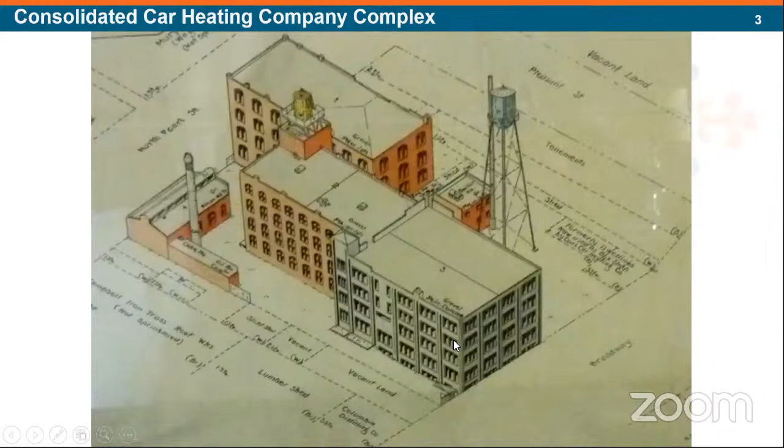The building's history and historic context are documented by the Sanborn maps. The building presents a clear material, structural, and spatial divide, distinguishing each period of construction. The 1893 and 1906 portions of the building, as illustrated on this 1908 Sanborn, feature brick-bearing walls with mill construction. The 1906 portion is set back to the south and east, while the 1893 portion is closer to North Pearl Street. Both portions historically featured 6/6 and 2/2 double-hung wood sash windows.

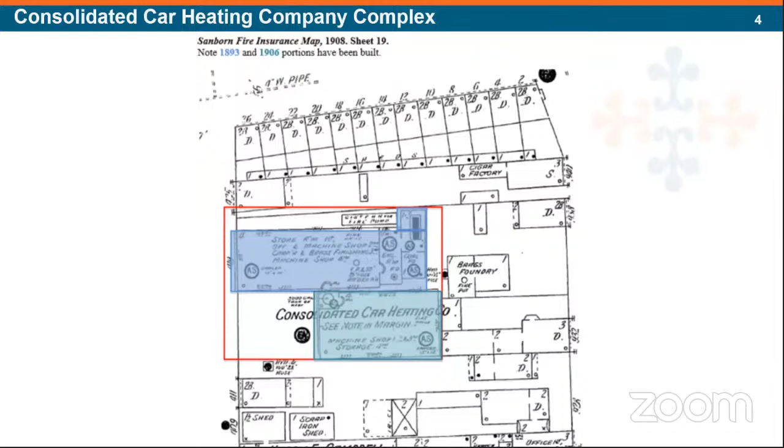Some do remain extant; however, most have been replaced with 1/1 vinyl sash. The windows featured arch heads and brick sills, typical of factory construction at this time. Next slide, please.

As you'll see in some of the images I have, a single-story concrete addition was added to the south of the 1913 portion in 1965. This is a non-historic component of the resource. Next slide, please.

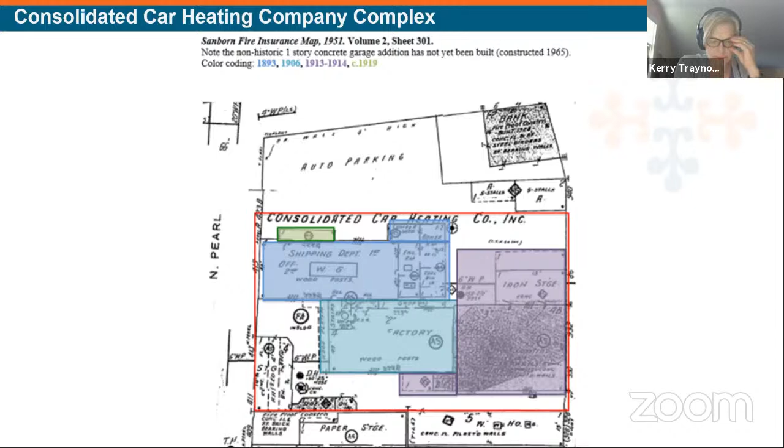I think it's interesting to know that fact, but I don't know that it matters. When it was on the side of saying everything up through the 1960s, it's a 50-year gauge, whether the property boundaries changed or not is interesting to know, but I don't think it changes the concept that this manufacturing complex adjusted and modified its physical features, including the site. But it is interesting to the question.

Yeah, I think it's less significant. If we had found that this was always part of it, used for various functions, and eventually as the 1965 building, that would be a strong argument for the complex. It has an independence in its own right that was added for a much different time and period and use.

And I can see it in the neighborhood, in the entire district, but I wouldn't like to include it in the period of significance. It's very well documented. It's a very specific thing that warrants an independent identification on it.

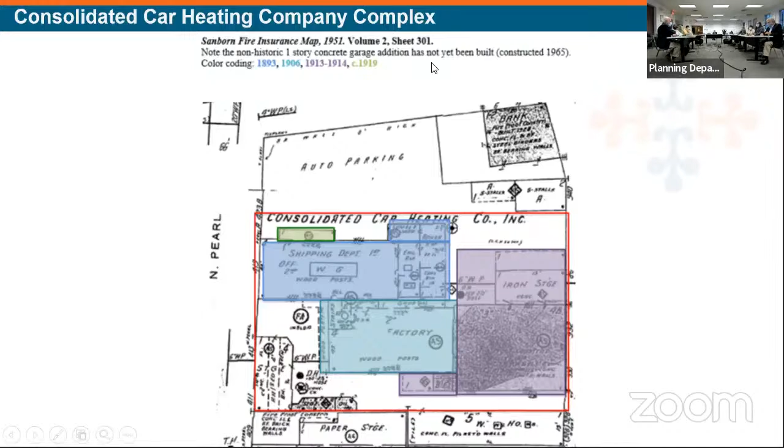Well, let me try my motion again. I'm not changing where I was, but the words are. I'm not certain how it gets excluded from the story in any way, whether a house is significant, less significant, more significant, it's part of the lineage. So my motion would be that we support the nomination as presented to us, and we express interest that all elements constructed within the 50-year period be considered in determining the period.

Second. Any other people signed up to say anything? Anyone from the audience care to comment on this? Okay, we have a motion, a second, I'll call it to a vote. All those in favor, say aye. Aye. Opposed? Motion is carried.

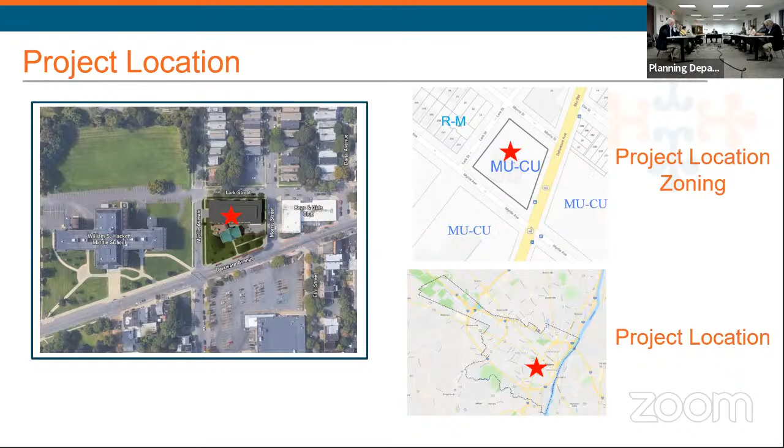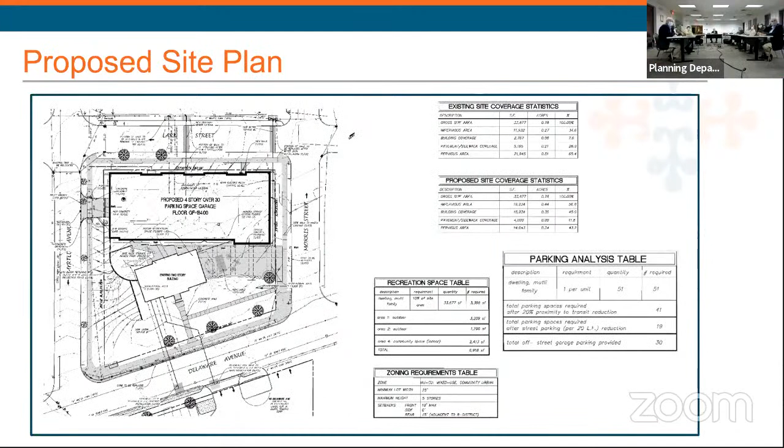I'll let Matt go to those. Okay, I think initially I'd just like to tell you that the site plan has changed somewhat. If you go to the existing conditions, it doesn't interest anybody other than the fire signal building shown there. That's the full site plan - it's changed, the shape of the patio has changed, and we made an attempt to save two more trees at the request of the city forester.

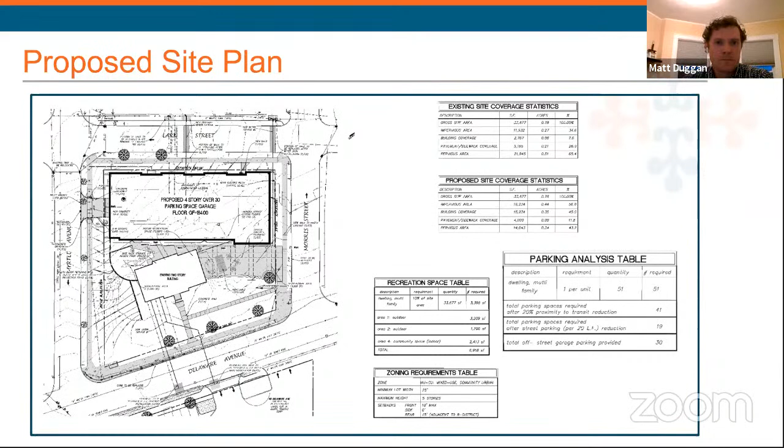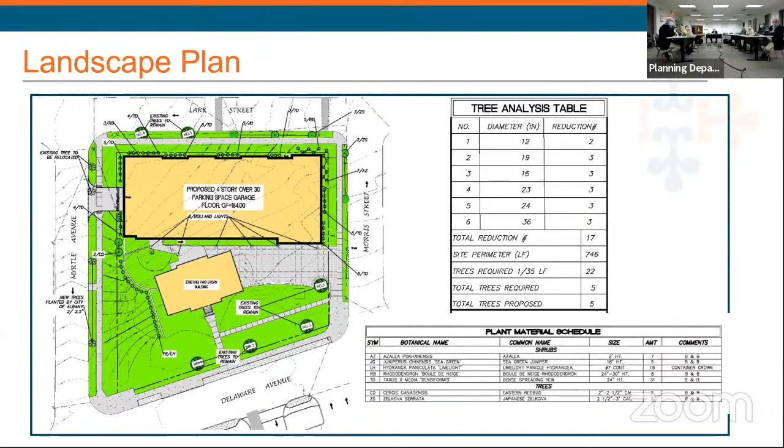If you go to the next sheet, which is the landscape plan, it shows the trees we can save, and it gives you an idea of the plan. We actually got our site plan approval from the planning board, conditional upon HRC's approval, so they were satisfied with the change we made to the site, and all the departments were satisfied. We had a whole bunch of other issues, stormwater management issues, as you might imagine with a site like this, which is in a combined sewer overflow area. We ended up putting a significant storage structure beneath the garage. We went through a whole bunch of issues there.

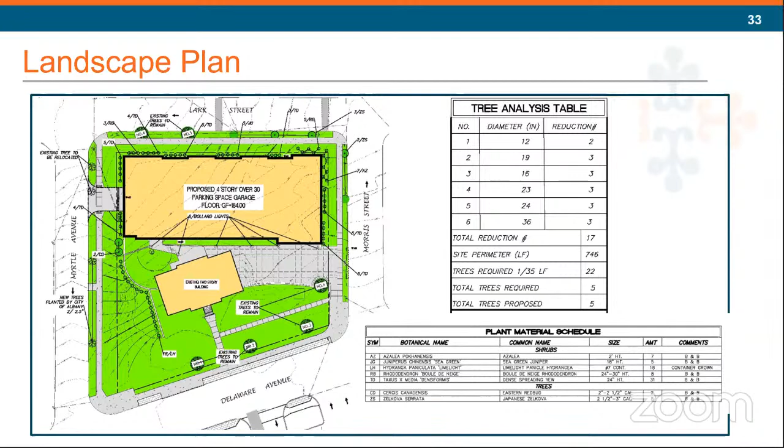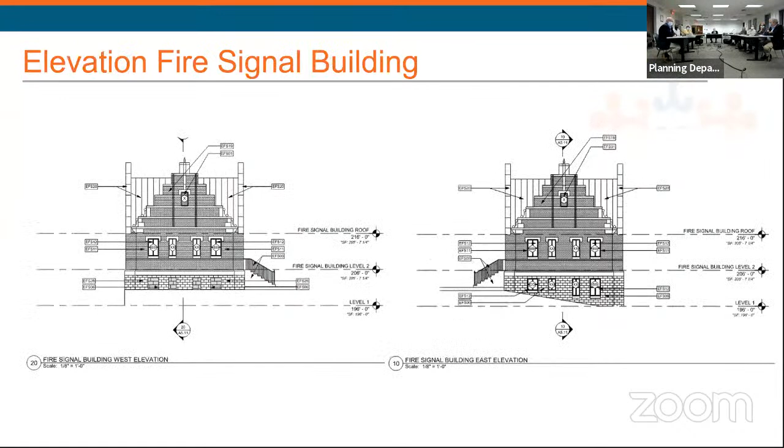But the issues that you folks are concerned with, if you go to slide number 6 - I think your numbers are different, these are different - I'm going to go right back to the one after the landscape plan. I'm going to let Matt Duggan take over at this point. Matt, you want to start them through the review?

Thank you all, it's good to see you at least virtually again. So one of the things I want to note as we go through this presentation is that we did include all of the comments from the June 2020 meeting and also from the summer 2020 site visits. As we go through the presentation, where we have the appropriate image, or in some cases there really isn't the need for an image, we have put in the comments and the design team's response to those comments.

Here is the Delaware Avenue elevation of the fire signal building. Here is the rear elevation of the fire signal building. At one point, the two buildings were proposed to be connected with a canopy; that is no longer part of the project. In this rear elevation, you can see the gray highlighted areas - those areas are currently large openings. So the backside of this building has significant masonry infill work proposed, and there are no existing windows on this elevation. I'll speak more about that as we go through some of the commission's comments from last year.

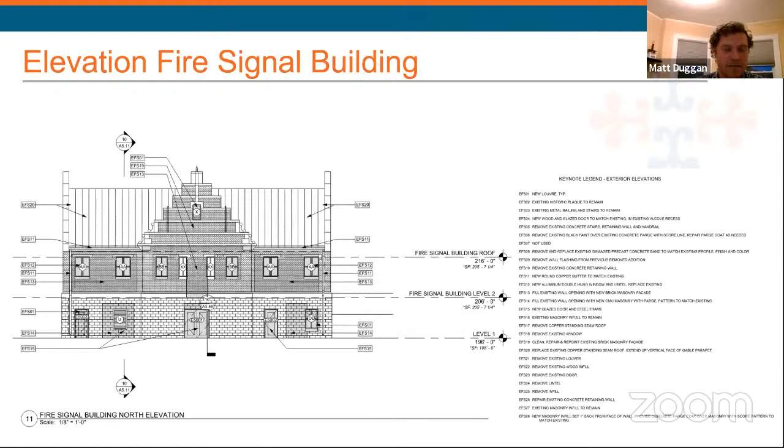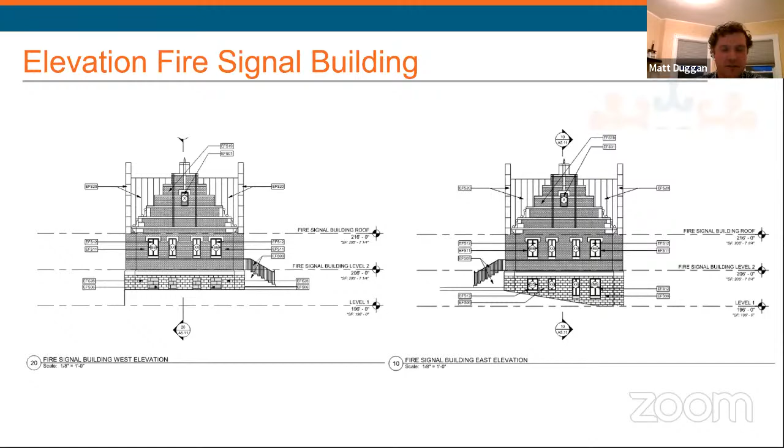Next slide, please. So these are now the west and east elevations of the building. The east elevation is the side that is presented as you enter into the site as a pedestrian. You'll see that as we go further into the presentation. Next slide, please.

So we've included the floor plans here to help orient how the building works and what is located on each floor. The image on the right is the ground floor. This ground floor is only accessible from the rear side, essentially the side facing the new proposed building.

You can see that on two of the four sides of this building, it is largely below grade. We'll see that further when we go to some of the images regarding the infilled openings.

The image on the left is the upper level, and this is the main floor of the building, if you will. It has an entrance with those existing stoops, which you'll see right in the center of the plan there. So from a functionality standpoint, originally the building was mainly entered from that second level, but what's proposed is for accessibility reasons that the primary entrance will be at this lower level, which is at grade.

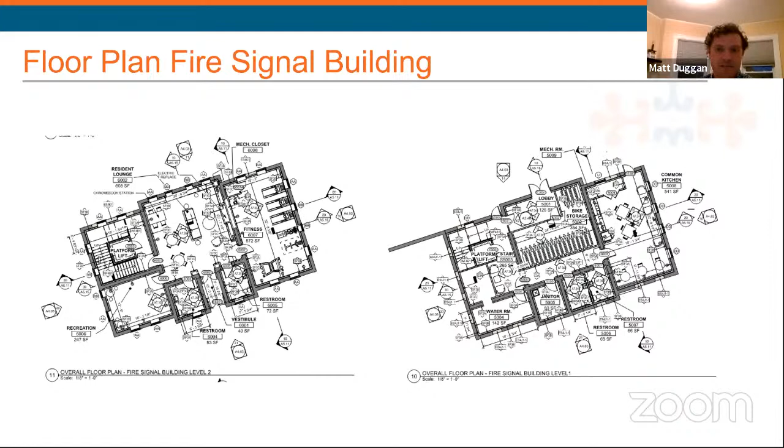So here are the first group of the site visit questions or comments. The first comment was, where existing brick units are severely spalled, new molded brick units are to match the original in all visual and physical characteristics, and to provide a sample for review and approval. So what we would like to do is provide samples and do a mock-up of this right on the building so that we can show the compatibility.

The next question is along the same lines: new mortar to match the original sound mortar in visual and physical characteristics, provide mock-up for review and approval. Our thought is we would do a mock-up for the mortar and also have the brick in that same mock-up. The third item would be to not clean the brick, but to just clean the decorative stone features along the gable copings.

So our response is we would like to do a mock-up of cleaning both the brick and the stone for approval. Next slide, please. Question on number 1 there.

Match the original, and your design response is that samples will be provided. Is the intent that those samples will all match the existing? Yes, that is.

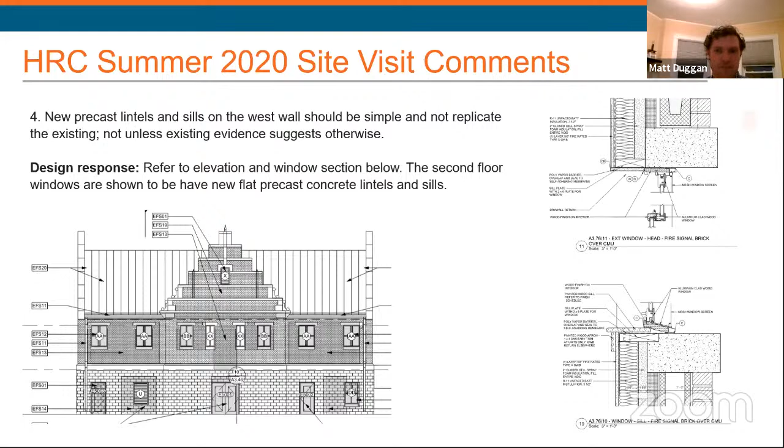Number 5, provide a mock-up demonstrating no damage to the concrete wall following removal of black paint, using the gentlest method possible. So we will be using the gentlest method possible; a mock-up is going to be very important. Start very carefully, with very low pressure, and see if that's enough, then continue to very carefully remove it with more pressure as necessary. Again, a mock-up will be done for this paint removal process.

Item 6, retain and repair existing historic copper roofing and flashing. There was no mention of replacement material — copper, patina, or aluminum with baked enamel finish matching the green patina. The existing copper material does not appear salvageable, so our proposal is to repair or replace the existing copper roofing with new copper roofing as required.

If there are salvageable portions, that is something that will happen. However, from what we're seeing, it looks like it's probably more on the replace side, but we're certainly not going to replace a copper roof that's in good shape. Again, the proposal is to replace it in kind with standing seam copper roofing where required.

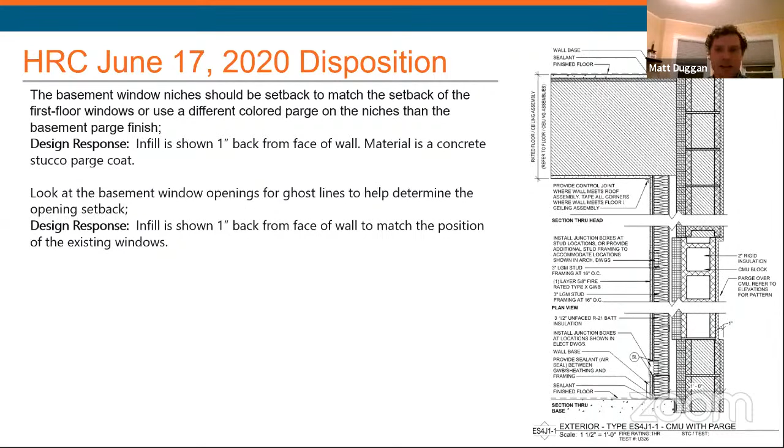And then the second comment was look at ghost lines, which is essentially what we were talking about with those score lines, and setting it back 1 inch. Next slide, please.

And again, there was a comment about that sills should be installed to evoke the feeling of windows, and those sills do exist, so those sills will be retained. Next slide, please.

Another comment was to revise the proposed stucco color on the northeast entrance to a darker color to help reduce the visual impact. The color we're proposing is intended to match the color of the brick in the fire signal building. The idea is to tie together the masonry elements of this entrance to be evocative of the fire signal building, but also take some of the more mid-century modern language from the former school, current Boys and Girls Club across the street. Again, the color is intended to match the brick of the fire signal building.

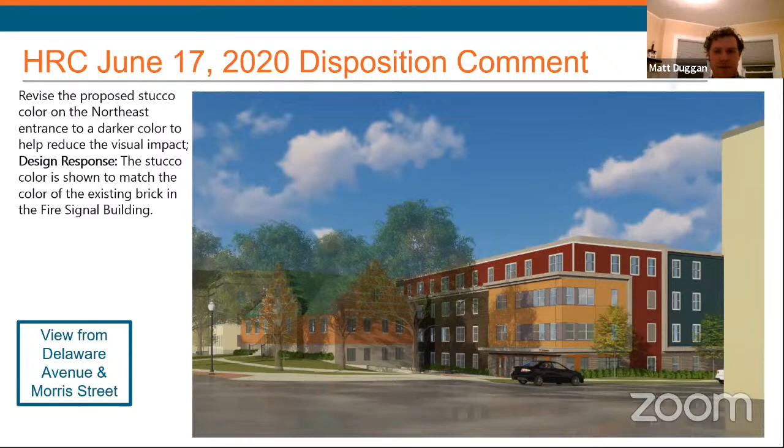Another comment was to explore the use of a random recess pattern with linear brick to provide visual relief. Since last year we've looked at the masonry on the proposed new building, and while we haven't taken this comment literally, we took the intent of adding more detail to the masonry. So what we're proposing is a soldier course along the top of the masonry and above the windows, and also a soldier course at the bottom of the windows, which you'll see in a later image.

We essentially have near floor-to-ceiling large openings. On the other portions of the building, where it's more punched openings at the units, that's where we had that soldier course below. Next slide, please.

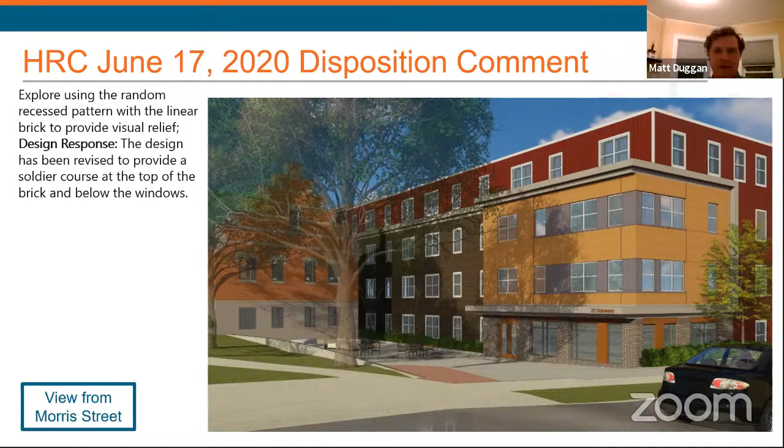In this image you can see that soldier course a bit better as we zoom in. We're trying to bring in some of the banding that exists in the fire signal building as a nod to it, and also bring in some of that masonry detail work found in the fire signal building. The comment here was to explore options to use architectural masonry block to reference the two-story masonry building instead of linear brick.

We looked at that, and we have changed the brick from what we presented a year ago. The brick is now a Norman brick, just under 12 inches long, compared to the 24-inch long brick we showed last year. This brick is different from the brick at the fire signal building, but we wanted a brick with a more linear nature, because we're really conceiving of this element of the building as having that mid-century modern influence, as well as tying into the signal building.

So we're trying to have this element be a bridge between the two buildings at this corner. Another thing this design does that's evocative of the fire signal building is that the fire signal building uses a brick upper level with a stucco parge and score lines on the lower level. Here we've essentially flipped that — we have the stucco finish with score lines on the upper two levels, and the smaller textured brick on the lower levels.

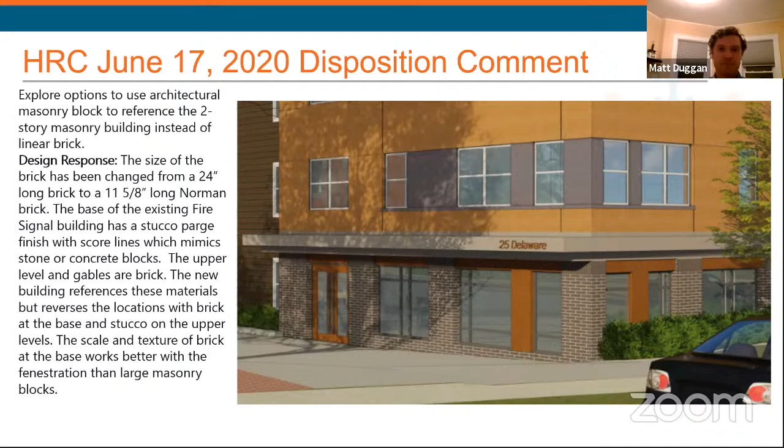The exposed concrete rear west wall should feature detailing or recesses that follow the 4-bay pattern of the residential building to reduce the visual impact.

The image below is what we presented last year, and the image above is what we're proposing today. We're looking to significantly reduce the amount of exposed concrete. We've taken the cladding of the upper levels of the building and dropped it 5 feet lower, lining up with the maroon section of the building on the left, which has a door out of the stair. That creates a nice datum line that wraps around the building.

It also works out well when it wraps to the garage elevation, landing right above the garage doors. Paired with the proposed plantings along this elevation, the amount of exposed concrete is greatly reduced. We're actually quite happy with this design direction — it makes the building feel more grounded and reinforces the scale at four stories, as opposed to buildings sitting on top of a garage. It also reinforces those bays, which you can see in the maroon color.

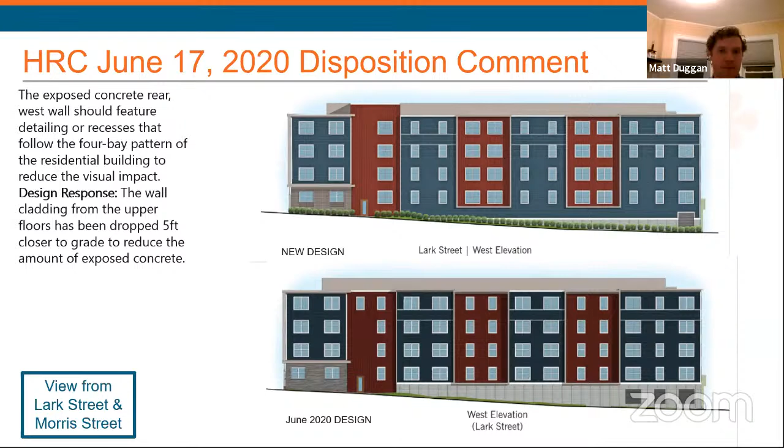Composite siding should feature a smooth finish. The design intent is to use the clapboard siding in a contemporary way to create a material transition from the predominantly masonry buildings along Delaware Avenue—that's the Hackett Middle School, the Boys and Girls Club, and the Fire Signal Building—to the predominantly wood frame clapboard buildings west of Lark Street. Using a wood grain, we feel, is more in keeping with those buildings. Our proposal maintains that, but we're using this in a contemporary way, not trying to make this clapboard evocative of metal panel or masonry. We're trying to really lean into the idea that these are clapboards.

This is the revised design from the corner of Delaware Avenue and Myrtle Avenue. You can see the garage in the lower left corner. The clapboard siding has been dropped 5 feet lower, lining up just with the top of those garage doors.

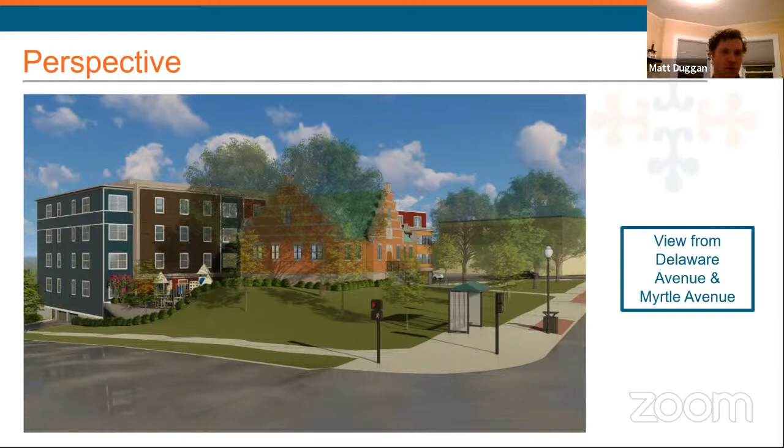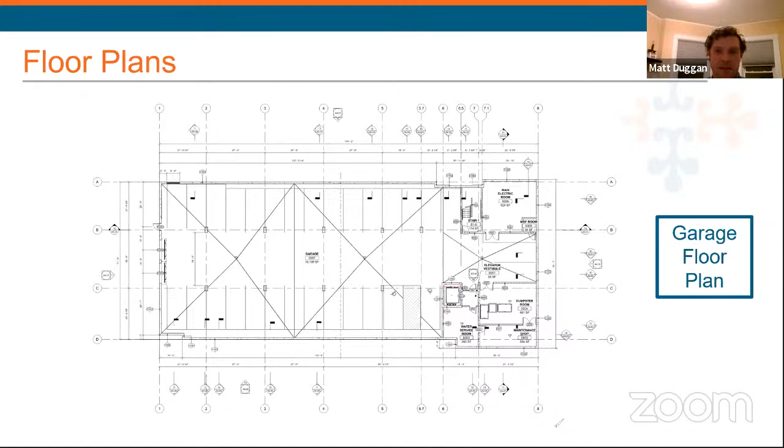I believe this is the last slide—do you mind just checking? Oh no, there's one more. The roof plan is included here to show that above the 4th level, there's a stair providing access to the mechanical units. There are mechanical units, but there is not a penthouse here—just an elevator overrun, a stair, a screening you can see here, and mechanical units serving the building.

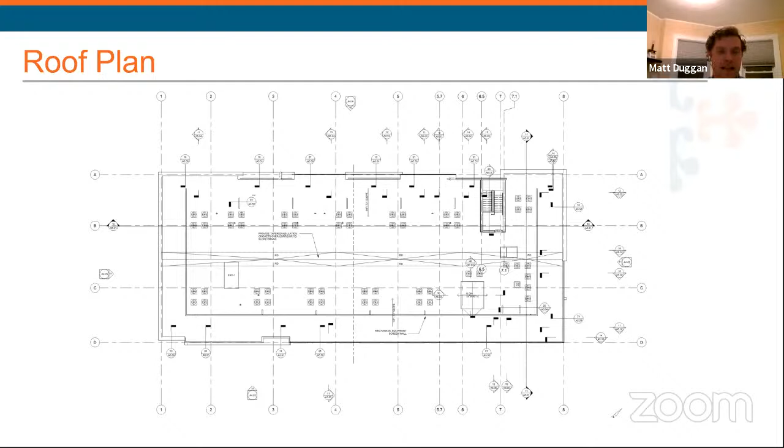Anne, if you go back one slide, there's one more thing I do want to point out. Yep. That's the last slide, I know—he asked me to go back one.

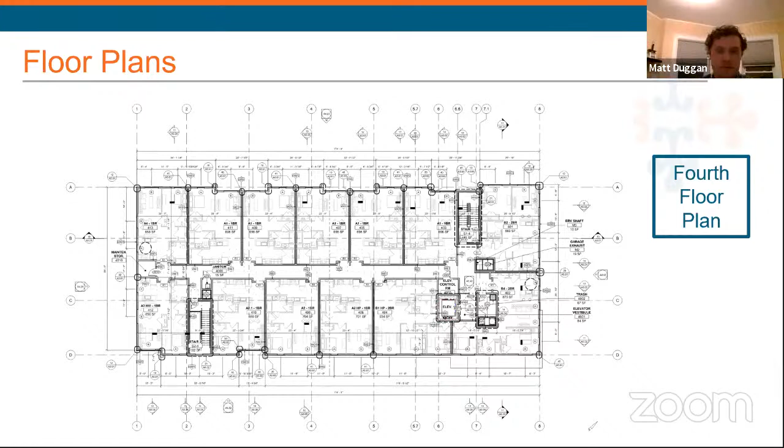I'll speak first. I'm actually pretty troubled by the project. I think the footprint is better, but this is one of our visually prominent buildings, and the level of restoration you're doing is not, in my opinion, good enough. I think you went through a lot of our concerns and it sounded like you dismissed them. I'd like to see much more effort on the existing building restoration, not just the copper roof—I'm glad you're keeping that. The treatment of the windows, the treatment of the lower level, those things are of concern to me. It's a very important building here, and it feels like it's being paid half attention to.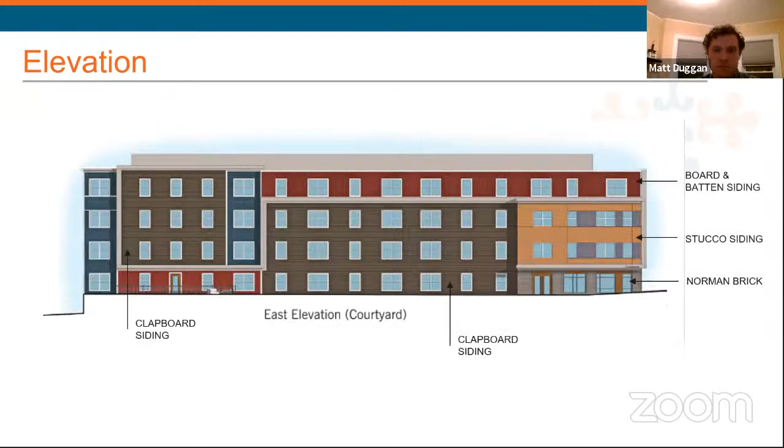But one more time, please, Erin, back to Delaware Avenue. Nope, sorry—well, that's another one that's very busy, and this does not highlight our building. From the treatment of grade and the windows at the lower level, I don't really understand what's being done with the primary windows. You said they were steel—I don't know that they're steel now, but then you want to put new aluminum windows in, not a restoration treatment. It's so dwarfed by this building, and it becomes even more so by your use of various colors and materials. I don't think that color reference you made on the right side to our building is supportive, as well as highlighting our building. So I'm not very supportive of what I see.

On that picture there, I thought we had enclosed windows. It's just an indentation on the basement level.

Aaron, do you mind going to the elevations of the fire signal building? This is more of a rendering—it's not the fire signal building here, it was more of a graphic representation. Here we go.

Yeah, but it looked like they were all smoothed over in the illustration, and they're supposed to show up—even if it's just a 1 inch reveal, something should be there, and the symmetry from the main floor down should be together. In the drawing, you get 2 horizontal lines that are all one color.

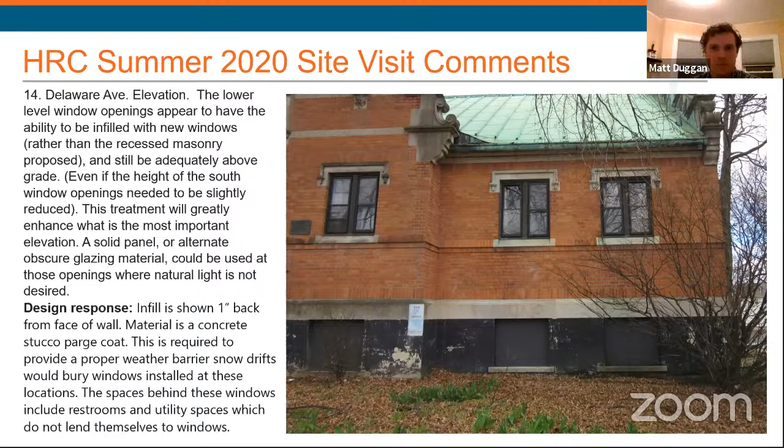Really minimize the concrete look. I agree, but can you go to the Morris Street side, the north elevation? Yep, with the new construction on it, the one that has the Norman brick on it. The rendering?

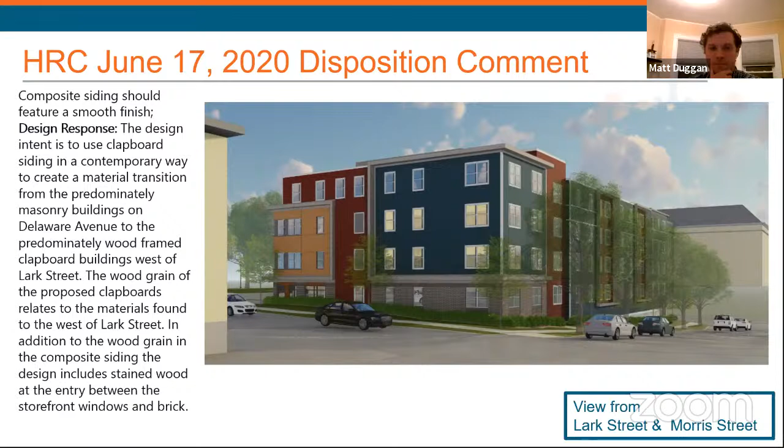It's, no, not in the disposition plan, in his... yep, hold on. Yeah, I don't understand. I mean, putting Norman brick there just makes no sense.

I'm reinforcing Commissioner Kaplan's point that it's just very busy, and this Morris Street, a very visible intersection, could be simplified. Please don't put Norman brick there, that's my opinion. I don't know if the other commissioners agree, but it seems like it's better to be true to what the building's trying to be than put in some material that doesn't belong on a ground floor foundation type elevation.

It never would have been there in the first place. When you say don't use Norman, do you mean use a modular brick? No, I'm saying use whatever, just don't. Frankly, I would rather see, I don't even know what, but not Norman brick. Just use one material there, and it's hard to give good feedback when it's so busy, because I don't even really know what to suggest.

What I would really suggest is pull the clapboard siding down to the level of the windows, and then put a belt course or something to delineate the end of the building. I keep thinking about the project we just looked at on North Pearl, and visually I keep coming back to a project like that. It's more simple.

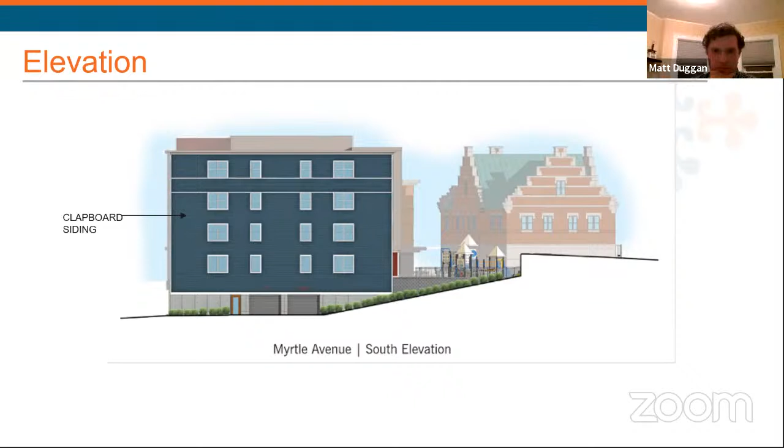Can you go to the Lark Street? I think it's the red and yellow, or red and blue, yeah. That could also be simplified, but at least you don't have... it looks like you have 2, well, except for whatever's going on at the end there, but let's ignore that side. But yeah, I don't know.

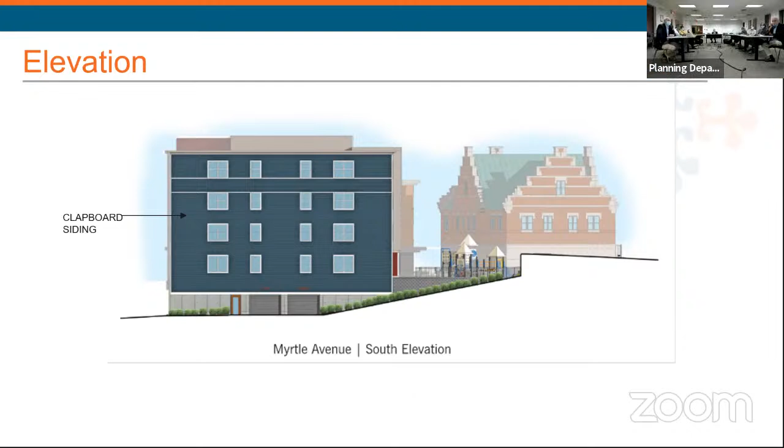I agree, I think the more... going back to the largest exposure there on the west end on Lark Street, I don't have a lot of problems with it. I think there's been a lot of improvements, but I'm a little bit nervous where it says board and batten on the red that goes from the floor to the ceiling type of thing.

I hope it doesn't look like corrugated metal on barn roofs that's painted red. I'd like to know what it really looks like. To me, board and batten is not all the same boards. You have a blank spot, then another, then a blank spot, then another thin board that breaks it up. When I look at this, it looks like corrugated metal that you put on top of a shed and then painted it red, and I hope the real thing looks a little more elegant than that.

It has a real utilitarian look to it, and I can't really look at the material, but somehow it's bringing to mind a different image.

Is this just a workshop this evening? Yes, so no action by the board tonight.

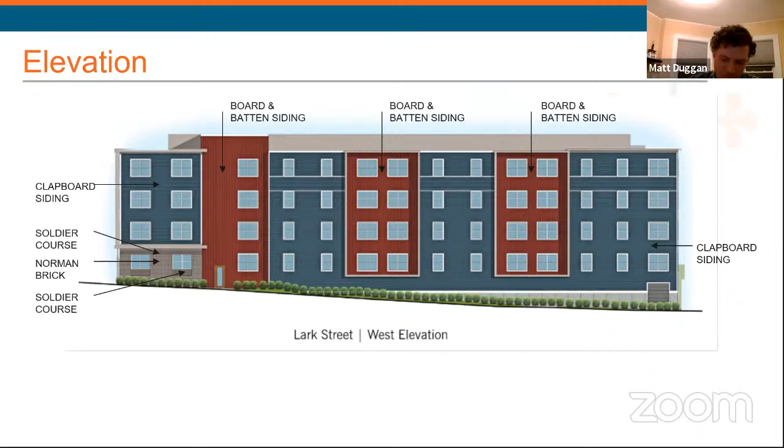I think the other thing is what was mentioned: the most important thing is to make sure the historic building remains the importance and the focal point of everything, whether the rest is compatible or even just a backdrop, a backing for it, showing for it. Usually the first memory you get when you look at it has got to be a favorable one on what a magnificent building that Marcus Reynolds building is.

Just to summarize, we're talking about trying to tone things down with a look toward a higher degree of simplification. Maybe not as much color contrast, and focus on the texture of the various materials and how they are juxtaposed.

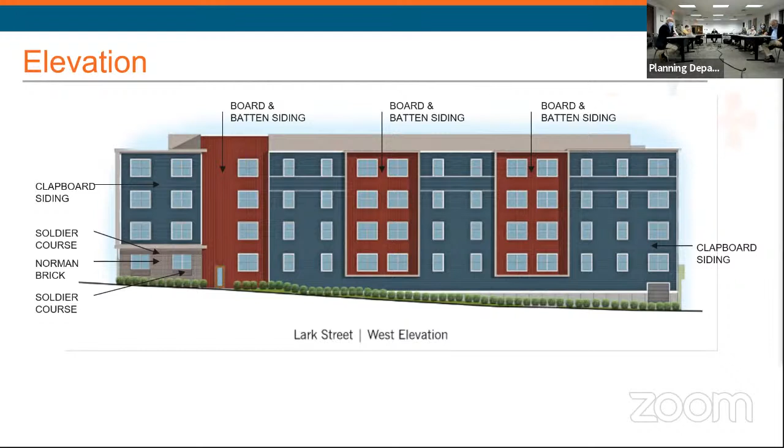I guess I'm not as troubled by the Norman brick as some people. If it was all Norman brick, that's a possibility for discussion, but there's a lot going on. There are a lot of different materials, and certainly a whole lot more attention brought to the restoration of the signal building.

Allowing that building in the back to be a lot more subtle, a lot more simple. I don't want to say clean, but uniformly simple.

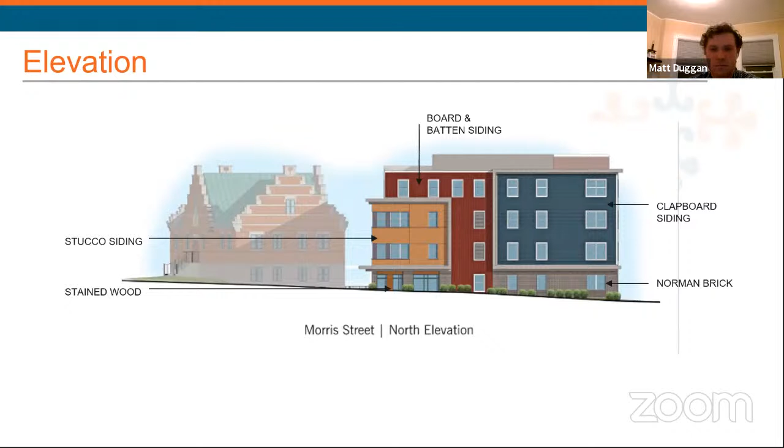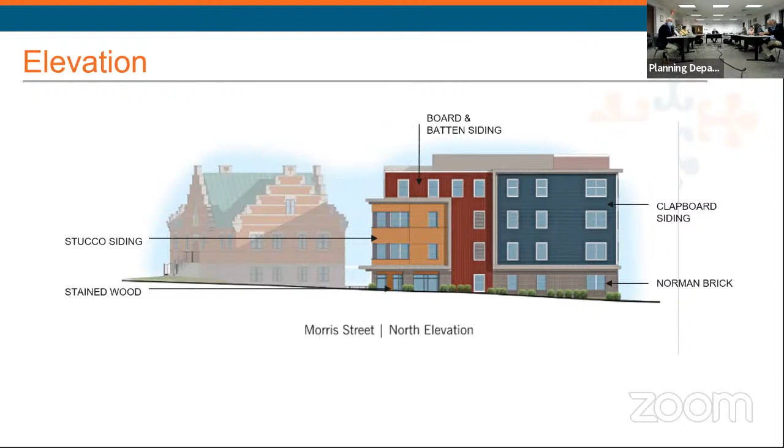I'm somewhat disappointed since I thought we had done a better job coming closer to what we wanted. I'll certainly take it under advisement and see what we can do, and see about getting samples from the materials so we can see what they look like.

Well, I think we're much closer relative to, we're not talking about the footprint and the connection to the building. I think it's really two categories. One is the finishes of the new building, and that's an architectural exercise.

And the other is a greater focus on the restoration, in particular in the lower levels, and what about the windows of the fire signal building. So those seem to me to be readily resolvable items.

Just to get a little bit—I'm sorry. It's now just a finish, it's not about the number of stories, as we've talked about before, it's not about the footprint on the site or kind of site planning. With the big picture, I think we've made a lot of progress.

I think also the colors, the variety of colors—there's a reason for that, and it's one that we wanted to see. It was to not have an enormous building behind the building you're trying to show off. And by breaking it up with both texture and design and color, it makes it less massive, and that's an important thing.

I don't have that much trouble with any of the colors. So if I may ask a question, there has been some very good, great, clear feedback, which I appreciate. The one area that I'm struggling to quite understand the concerns with is this elevation in particular.

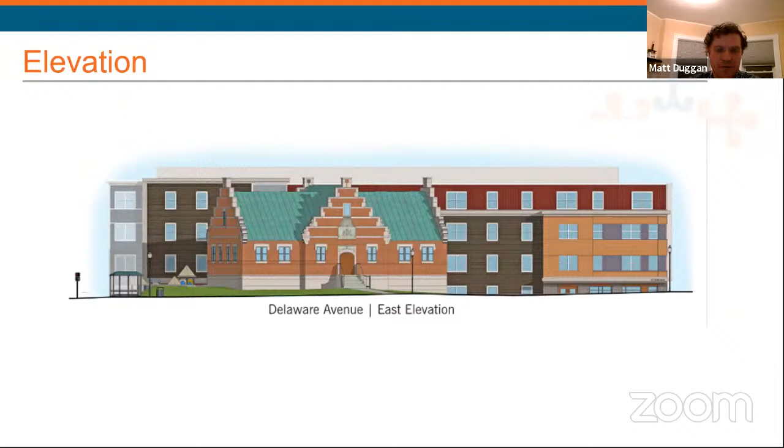Aaron, do you mind going to one of those elevations so I can get the direct idea? In the beginning of the presentation with the fire signal building elevations, I think the comment pages were made over existing photographs. You want to see the existing photograph one and then...

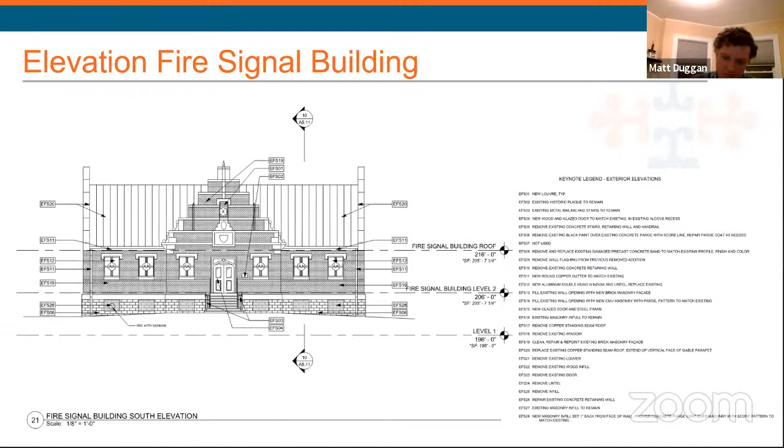Thank you. Again, I guess we got our comments and some marching orders. We'll see what we can do next time around. Thank you all for your feedback and your time. I think it's come a long way—it's very close.

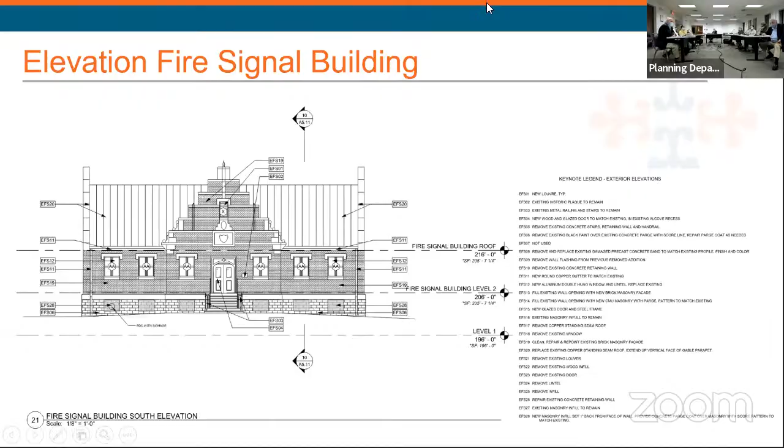Let me just double check—we don't owe anybody a motion on this. No, if there's no motion, this will come back. Typically this would come back at the next meeting for a hearing, and then the commission would take action at that meeting.

I think we'd like to hold a time on your next agenda. We're not certain whether we can make all the changes and get the samples together by then, but I would like to hold this based on your next agenda. Okay, we can do that. All right, well, thank you.

Are there any people signed up to make comments? Okay, not this evening.

The bill hasn't passed yet, but the state legislature has put forward a governor's program bill. It relates to the eviction moratorium, but part of the bill relates to the New York State Open Meetings Law. They're trying to change the Open Meetings Law to allow for telephone participation while still having an in-person component—you'd also have the option of meeting fully virtually, conducting the meeting by telephone conference, and allowing the public to attend 100% virtually rather than in person.